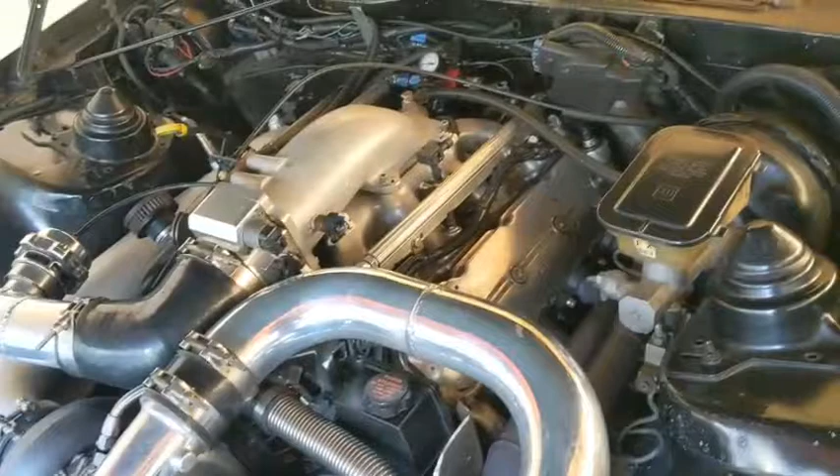I still haven't done the intake manifold. I do a lot of stuff here, but bigger stuff I like to do at my brother's house, just because this is just a little carport tent. He's got a garage and tools, and it's just easier to work on.

Where I'm at now, I started tuning, laying into the throttle a little bit, and it's been a disaster, to be honest with you. I'll show you guys on the data log quick. Okay, here's the data log, and forgive me, I'm still learning how to use this, but I got a slight handle on it, I think.

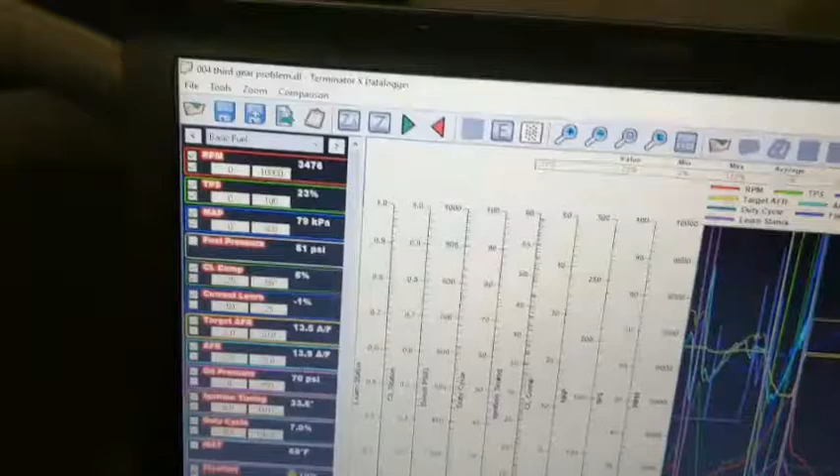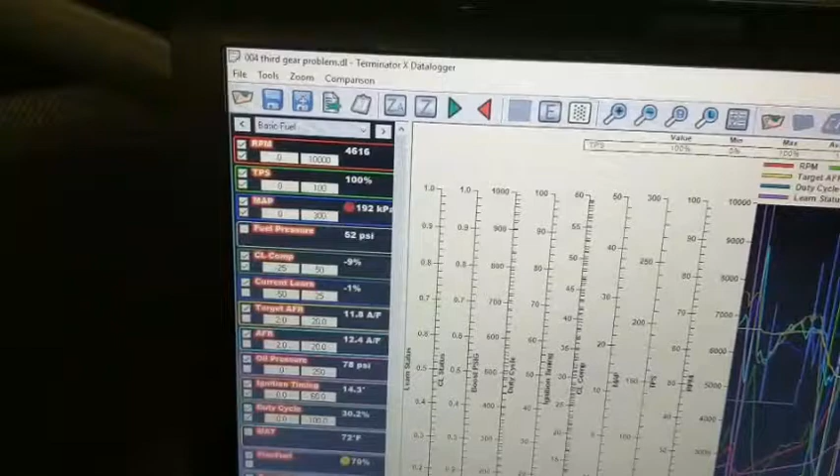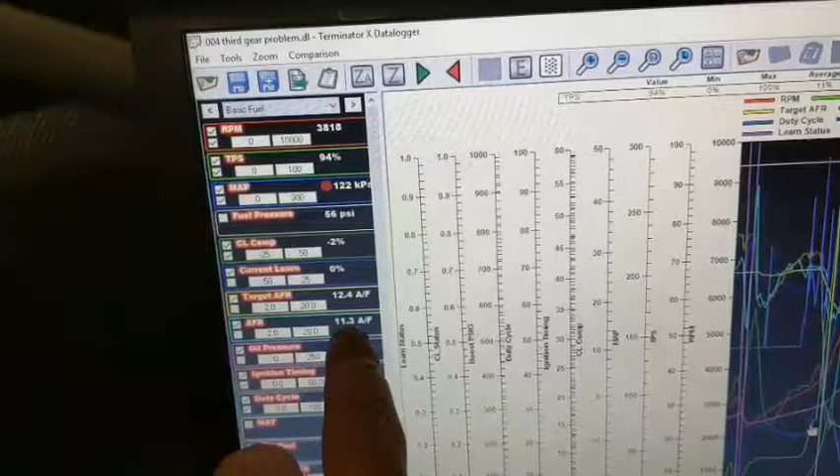Duty cycle on the injectors. Ignition timing. Oil pressure. Here's your actual air-fuel ratio, and here's the target air-fuel ratio. So as you can see, this is the closed loop compensation. So that's what it's doing to try to achieve the target. It's doing work, it's pulling fuel. It was too rich. So as we scroll along here, you'll see.

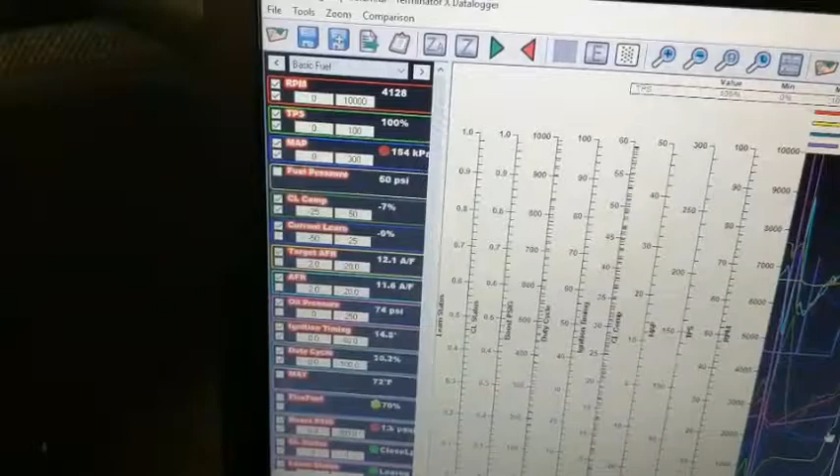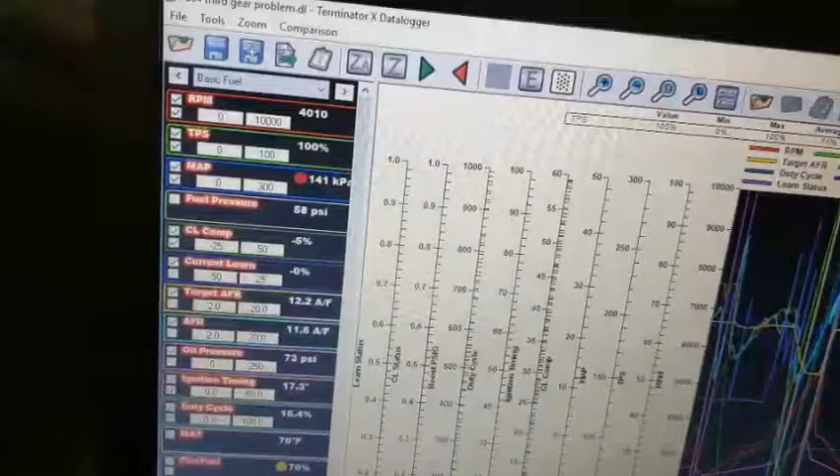Look at fuel pressure. That's one thing that was a red flag right away. Fuel pressure should not be dropping like that. I have a 1-to-1 boost reference, so as boost increases, so does the fuel pressure on a 1-to-1 ratio. So let's say my base is supposed to be 43, but with the vacuum line hooked up, it's like 48. So 48 pounds of fuel pressure plus 1 pound of boost, it should go up.

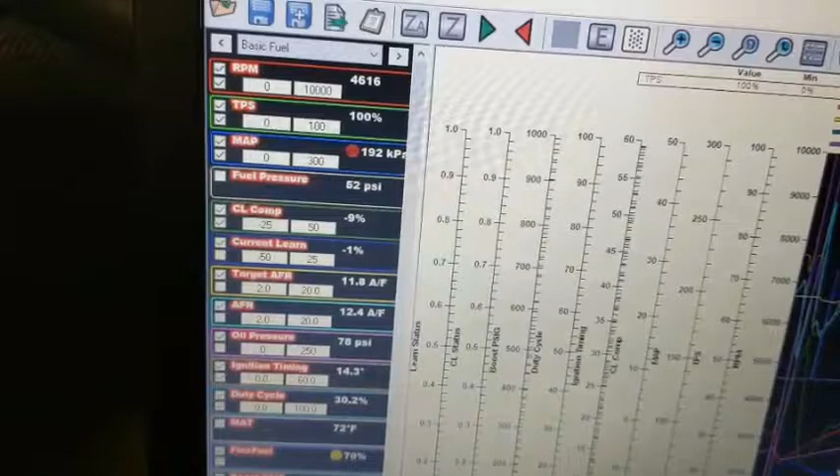So it does start to go up, and we're at almost 6 pounds of boost and 52 pounds of fuel pressure, but then look at it, it just starts dropping like a rock. 44, 43, 41. So fuel pressure's going down. Huge red flag right there. And what that was is, I'll show you guys, hold on.

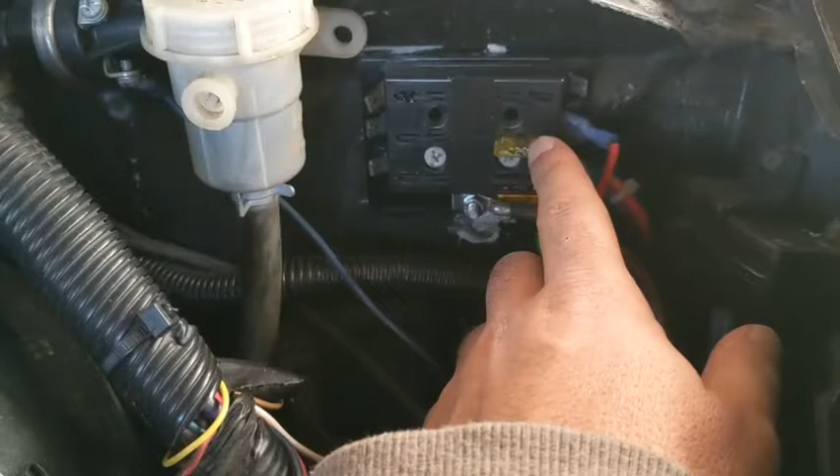What that was, for some reason, and this type of stuff happens, these are my two fuel pumps. The 20 amp is the single fuel pump that Holley runs, so I run on a regular fuel pump. I have 3 fuel pumps in this car. It's a 255, and that's what you use for cruising around. And then when you get into boost, secondary fuel pumps kick on with this Hobbs switch here.

It's adjustable. I have it on 2 pounds of boost, so 2 pounds of boost is supposed to kick on these secondary pumps. This is a 40 amp fuse right here, because each pump is like 15 amps, so to be safe I put a 40 amp fuse in there. For some reason, there was a 20 amp fuse in here, and it popped, and my secondary fuel pumps didn't kick on. So that's what happened, and it could have been disastrous. I'll show you guys what I mean.

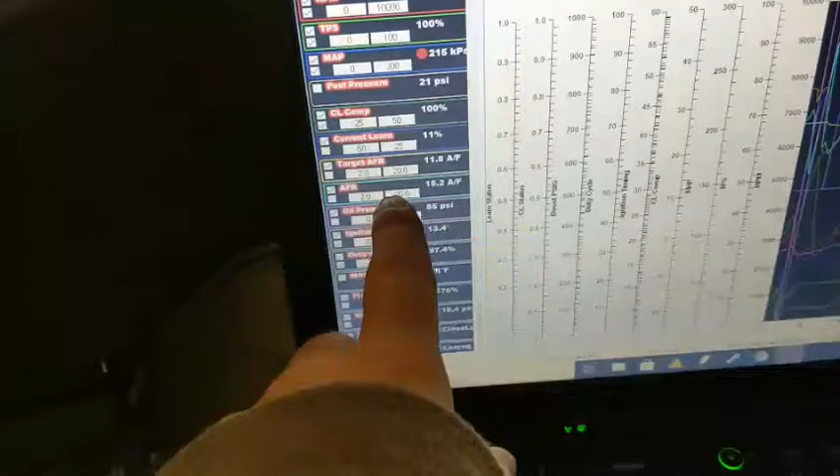Basically, we're at 21 pounds of fuel pressure and 16 pounds of boost. And look at the closed loop compensation. It's throwing everything it's got at it. 91%. You keep scrolling, 100% closed loop compensation. It's throwing everything it can to try and keep the AFR target 11.8. Look at what it hit, 15.2. That's insane.

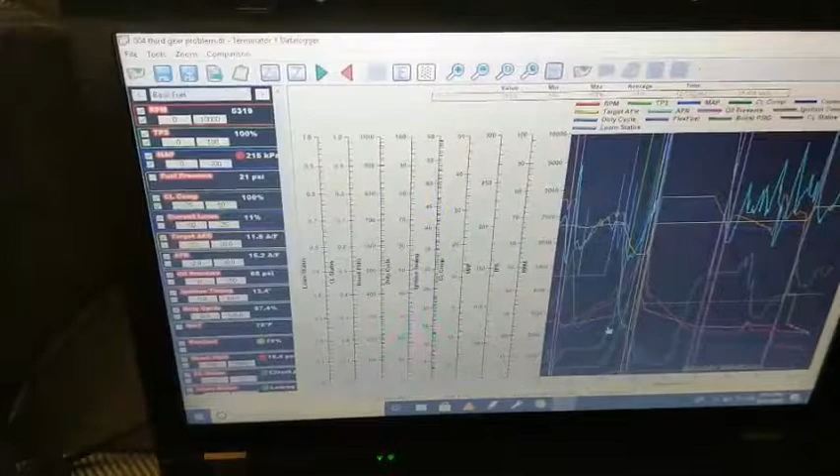If this motor was stock bottom end, stock pistons, they'd be at the bottom of the pan right now. A lot of guys do a lot of things with the stock bottom end, but stupid stuff like this, something will happen, and you got pistons at the bottom of the pan, or at the very least a broken ringland, melted piston, what have you.

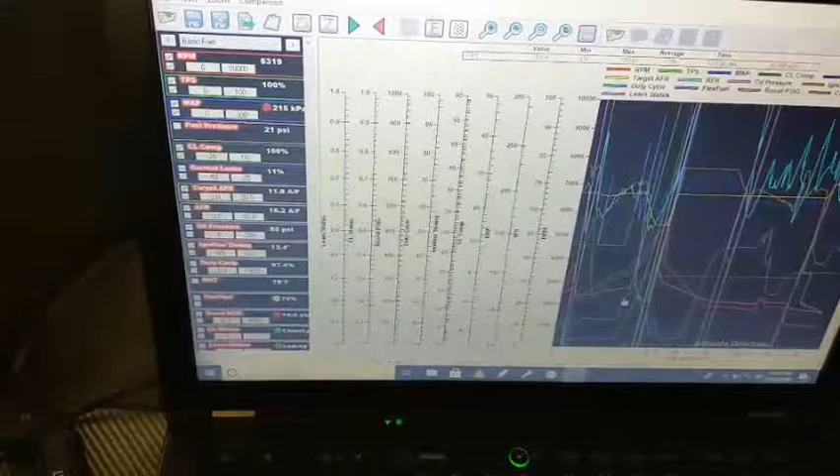So I was really lucky with that. I don't think the motor's hurt at all. Seems fine. Some would say, oh, you should do a compression test, yada yada. But it was only 5,000 RPM. It was like a split second that it hit that high.

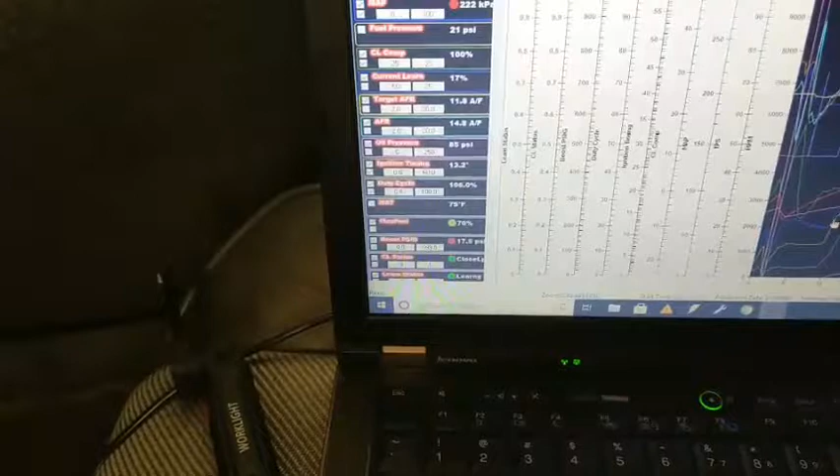And the other thing I'm noticing too is if you look at the boost down here, 16.4 psi. Wait, look, 17, 18. It hit 18, almost 19 pounds of boost with a 15.2 air-fuel ratio.

That's crazy. Again, built motor. That's why it survived. Forged pistons. Yeah, that would have killed any stock motor, I think. So, what happened there? I'll try and show you guys.

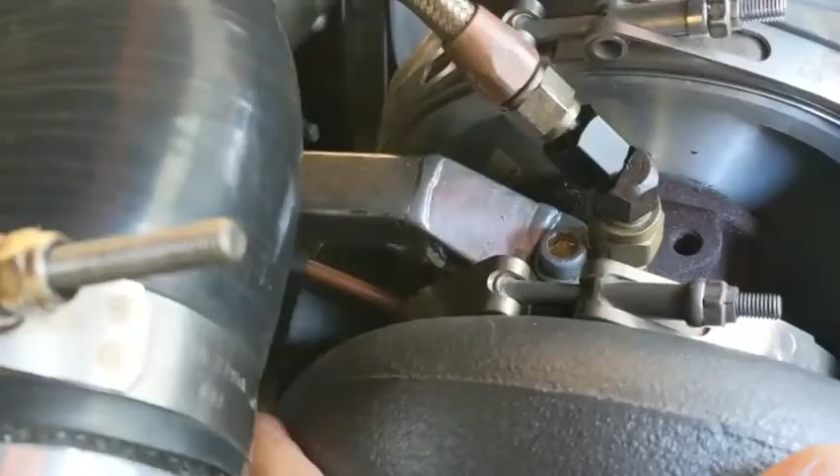Okay, I think what happened there, it's kind of hard to see from this angle, but you see this little copper line right there? That is my wastegate reference. That goes to the bottom of the wastegate down there. You can see the fitting there. But what I think happened, and I noticed it was slightly kinked.

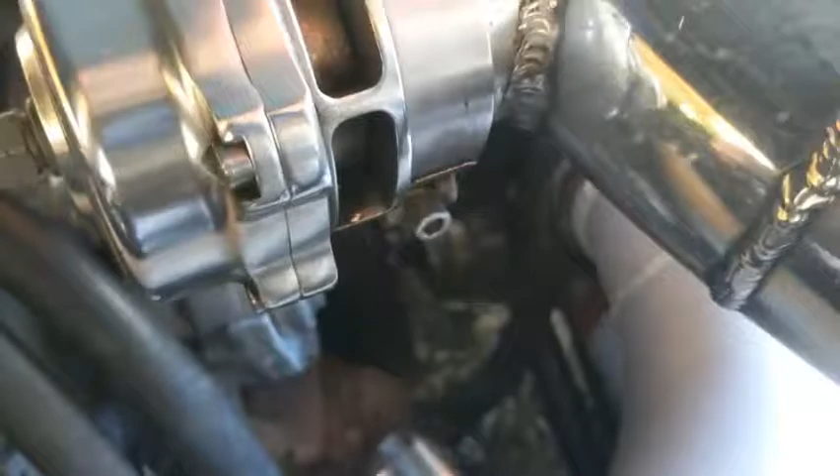So I bought some goodies. Basically this is just an oil feed line. The reason why I run copper over there is because it's extremely high temperatures. You can't even see it down on this side. It's a pain. But yeah, so I run a piece of copper on there, but my fear is that it's kinked. I'm going to take it off and look, and I'm going to replace it with this bad guy.

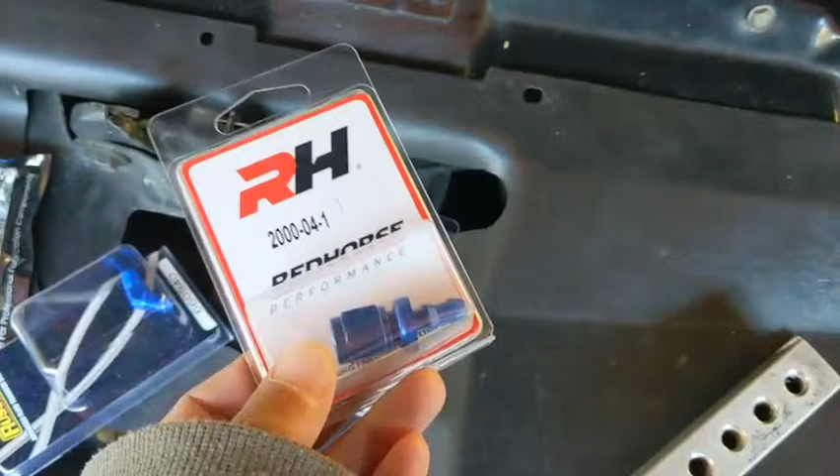And I got some fittings to do that. I can put a 45 on it, possibly, on the wastegate, and then I'm going to screw this guy on, and then it'll go to hose, and then go to that plastic line. I ordered one of those push lock fittings so I can screw right on the end of this one. So yeah, I won't have a piece of hose being janky with clamps on it or whatever. Those push lock fittings work pretty good.

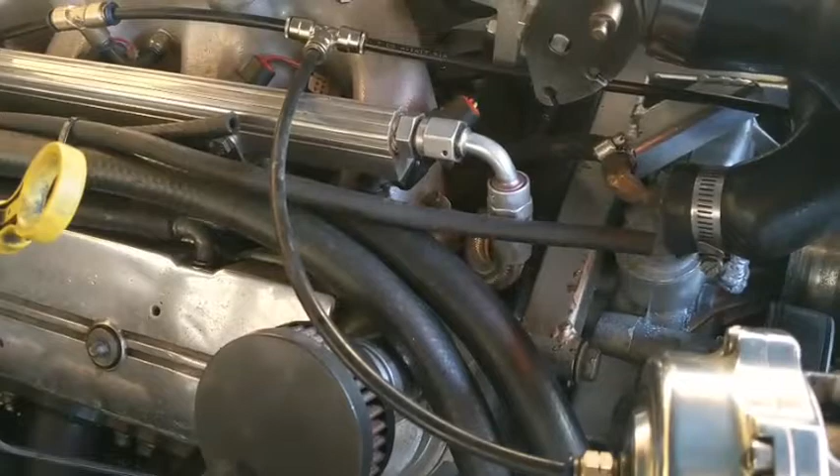You got to be careful. You got to get the good brand stuff. They sell cheap stuff that melts. This is official, high temp, high pressure. They use it on air brake lines for trucks and stuff, so it's got to be reliable. It's got to be good to stop a big tractor trailer. So that's my plan for today. I'm gonna swap that line, take it for a ride, and keep an eye on the boost.

I did do another pull after I changed the fuse, and fuel pumps were kicking on. Air fuel ratio was better. I'll show you guys that data log quick. Okay, here's the second data log. I did just a quick second gear pull just to see what was going on here, and let's scroll and see what happened. Fuel pressure is 52, 2,000 RPM, 3,000 RPM, 60 psi. It's going up, stayed up. 64, 65, 68. So yeah, wow, I hit almost 6,900 RPM.

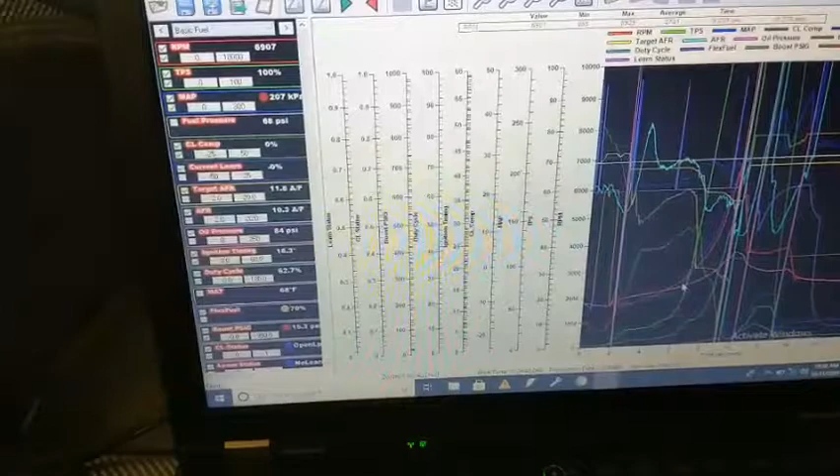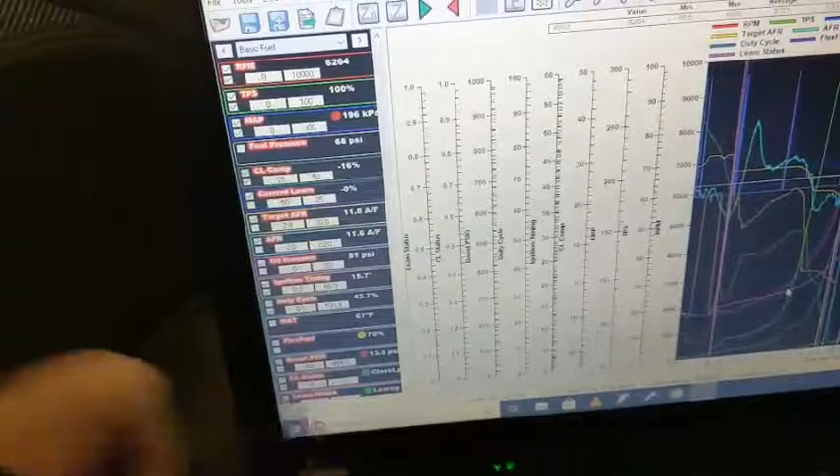So yeah, this time it did a lot better. The fuel pressure didn't drop. Look at the closed loop pulling 16%. There's way too much fuel in there. I sent my file to Matt, and he threw some more fuel at it just to be safe. I was a little concerned, on one of the small pulls I did, the air fuel ratio target was 11.8 or something, and I was seeing 12. So he just splashed a little more fuel at it.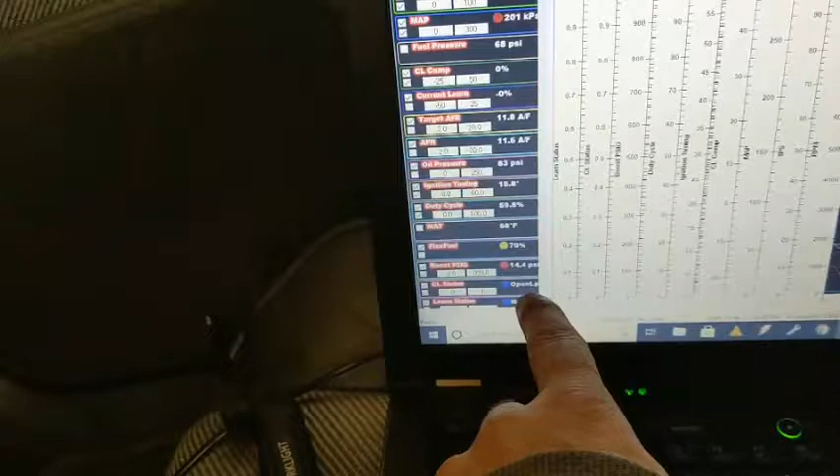But it looks like the closed loop's doing its thing. It's pulling fuel to try and achieve this target AFR. 13.5 pounds of boost. I did see a little creep on this one as well. Second gear, it spun. See, why did it go in an open loop there? That's weird. See how it says open loop? Why the hell is it going in an open loop? That's strange to me.

But yeah, it hit 16 pounds, which it shouldn't be. I have a 14-pound spring in there, and I guess it could creep a little bit. But yeah, that's weird why it went into open loop there. Why did it go to open loop? That's interesting. I'll have to talk to Matt about that.

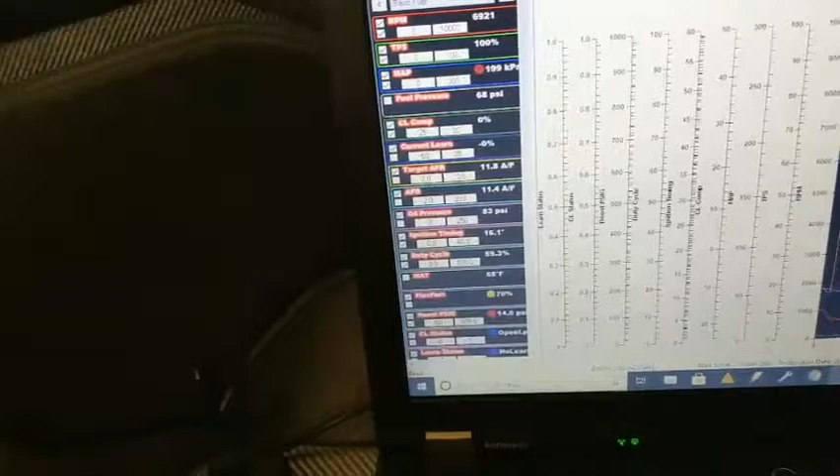Alright, and I wanted to show you guys one more thing. Let me find it. Okay, this is the fuel pressure safety. There's fuel pressure safety. What's this one? Oil pressure safety. Flex percentage. That was me trying to get the, that's nothing.

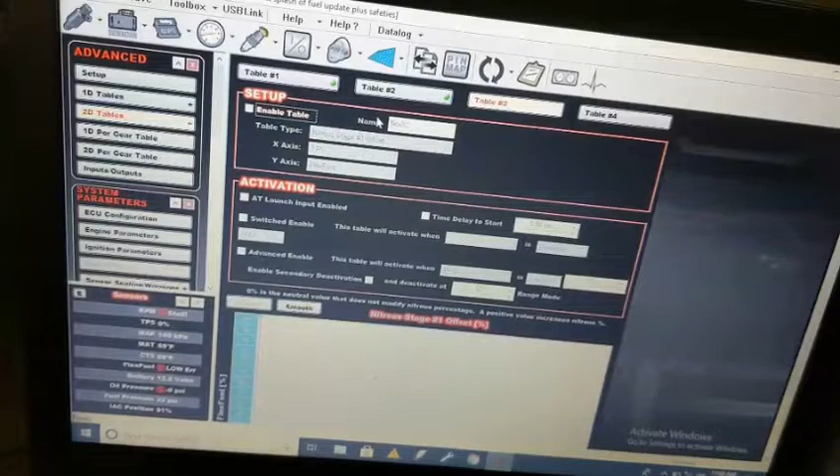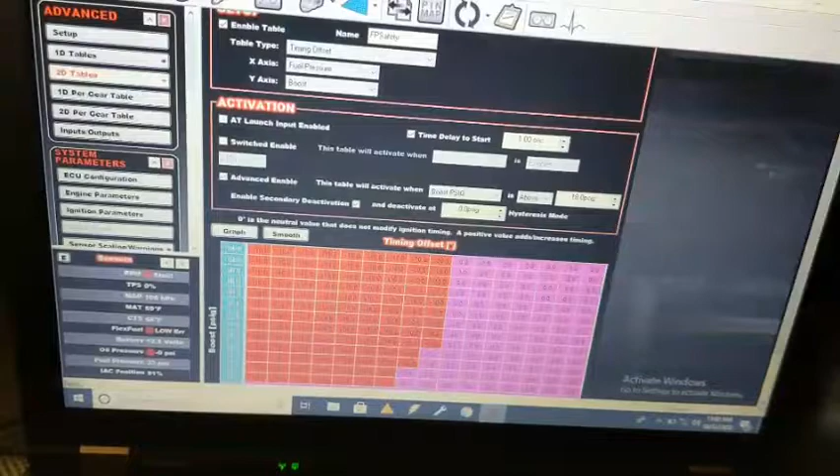Yeah, I don't know what these are. But so, fuel pressure safety and oil pressure safety. So it's a timing offset, which I set that up. So basically it's going to pull timing. Before it was a dwell offset. Like you can click this and change what you want it to do. And I think before it was a dwell time offset, which I'm guessing that's a spark cut. I have to research it.

I'm new at this. Bear with me. I know some of you guys are probably screaming at your screen. But so for now I did a timing offset.

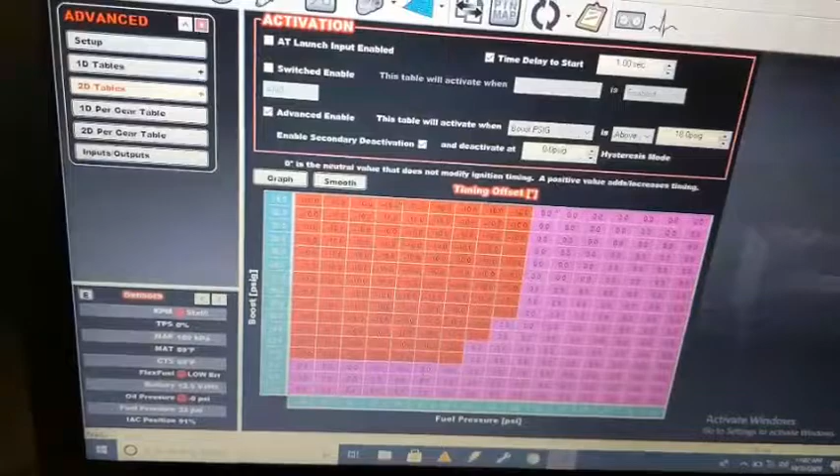Oh no, what'd you do? Go back. Shoot. How do I undo? Hold on. Let me see here. Okay. Again, I'm new at this. I just closed the tune and opened it back up, and it's still there. So I did save it. I try to make a copy of every tune I do.

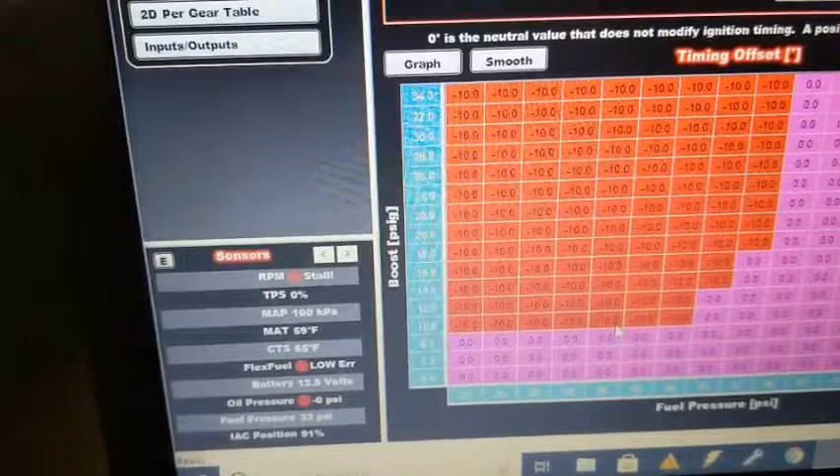But anyway, what I was saying was this is a timing offset based off of fuel pressure and boost. So if you look on this right corner over here, let's say we hit 20 pounds of boost and 57 pounds of fuel pressure. So if that ever happens, it's going to pull 10 degrees and basically try to save it.

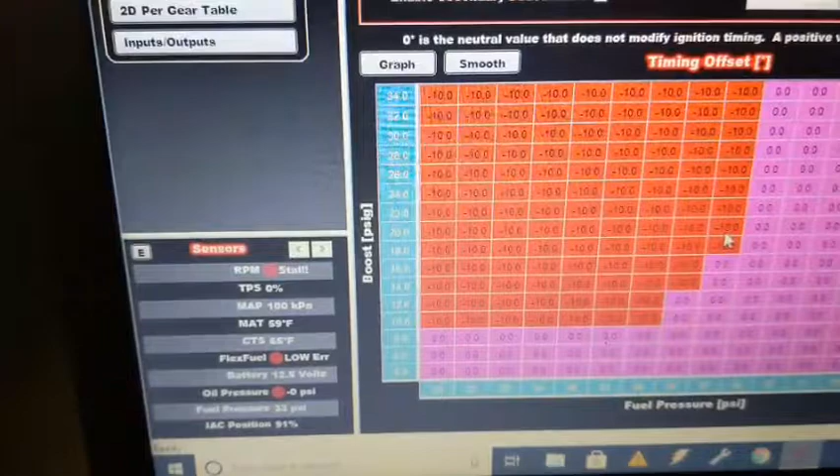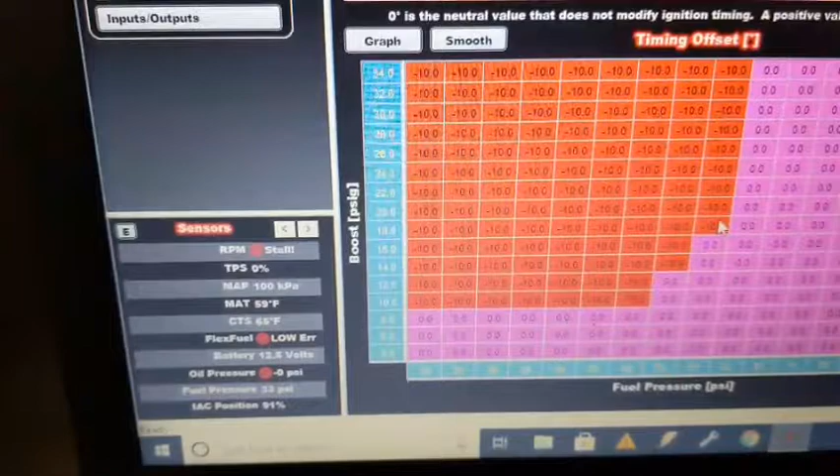I mean, I could probably adjust these and move it closer, but even at that point, 57 fuel pressure would be dropping, because you figure I'm at 43 base pressure plus 20 pounds of boost, should be at 60-some pounds of fuel pressure. So this might be a little oversensitive, I guess, but again, I don't know.

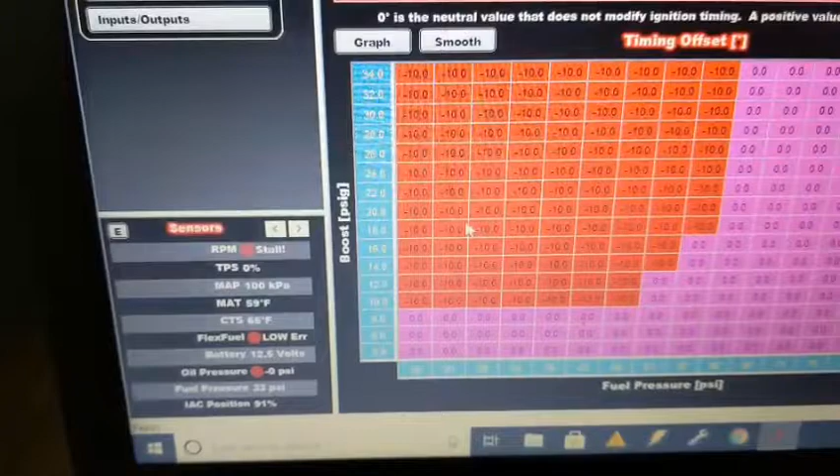I have to do my research, but at this point it looks to me like if you're at 18 pounds of boost and 57 pounds of fuel pressure, see, that might be too much already. What's 18 plus 43? Yeah, so I might have to tweak this a little bit, but yeah, if fuel pressure gets out of whack, it's going to start pulling timing 10 degrees.

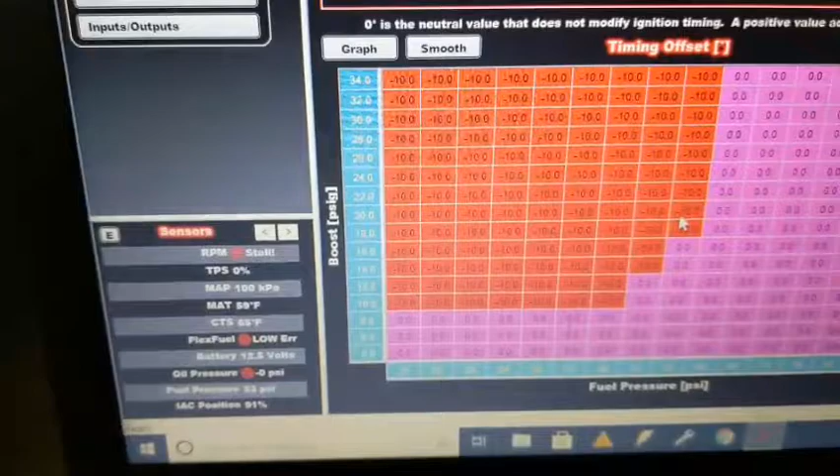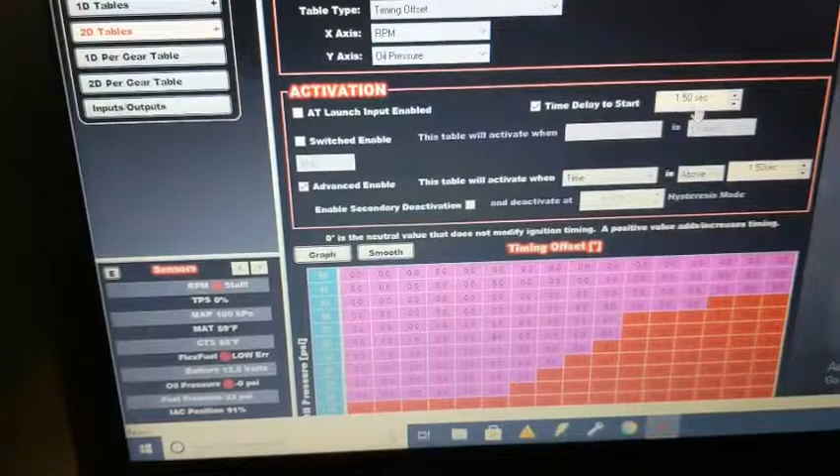And same thing for the oil pressure. I didn't have this set up before, and now I'm going to do some research and try and get it set up right. I mean, I have this stuff in here built in, so you might as well use it. Same thing, timing offset, RPM, and oil pressure. So again, I have it set up to pull timing basically. So this thing has crazy oil pressure with this oil pump in it.

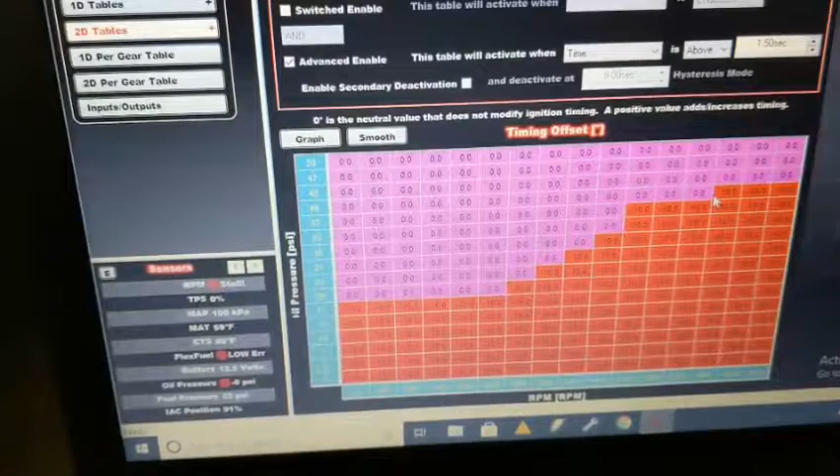But if it ever goes down to, let's say, 40 pounds of oil pressure at, what do we got here, 6,900 RPM, it's going to pull 10 degrees. It'll never go that low. I think it hit like 80 on the data log. But if it does go that low, then you clearly have a problem, and this will shut the engine down, or at least pull power, and you'll feel it and let off like, whoa, what the hell was that?

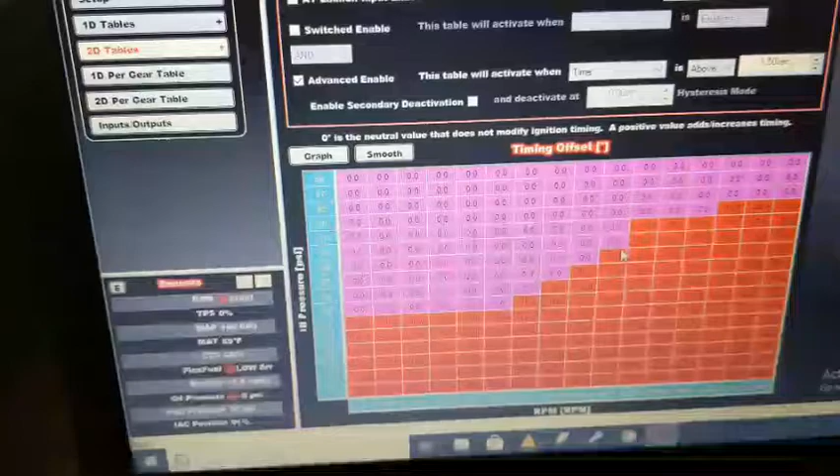But yeah, I want to do my research on this and get these tables set up better. Maybe it's better to do the dwell offset. Yeah, I want to do some research and set these up right. But for now, it's going to pull 10 degrees of timing if any of these get out of whack. So yeah, that's what I'm going to do there.

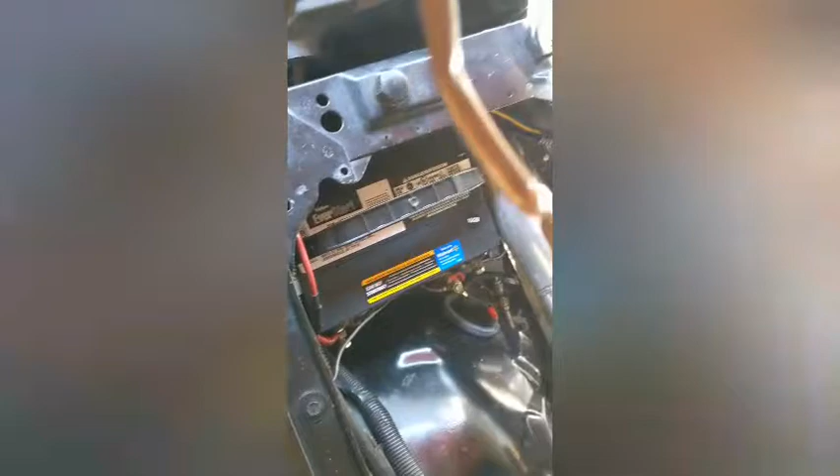All right, now let me get over and I'm going to change that wastegate line and take it for a ride. Okay, so here's the wastegate line, and it's all mangled up, but admittedly I don't think it was that bad initially. Like when I went to loosen this fitting, the fitting that it attached to was NPT, and that started turning, so the whole thing was turning and I didn't notice, so I kind of fucked it up removing it. But yeah, I'm gonna put this bad boy on here and route it so it's not rubbing anything.

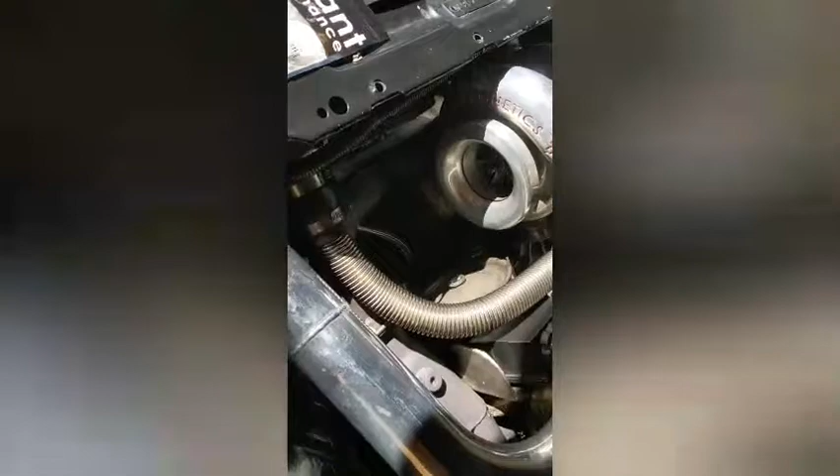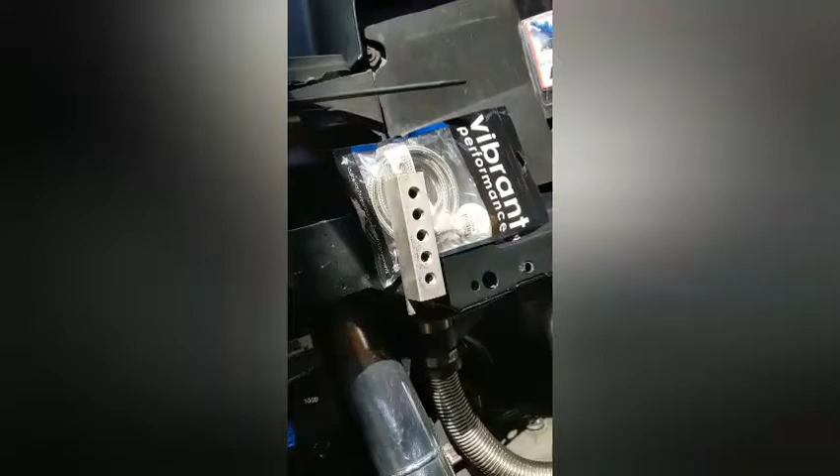It's tight down there. The other thing I want to do is, this is my fuse block. I mean, not fuse block, vacuum block. And I used to have that underneath the throttle body, like down in here. But now that we're running the turbo brace, it kind of doesn't fit there anymore. So I'm thinking maybe I'll mount it on the firewall or something.

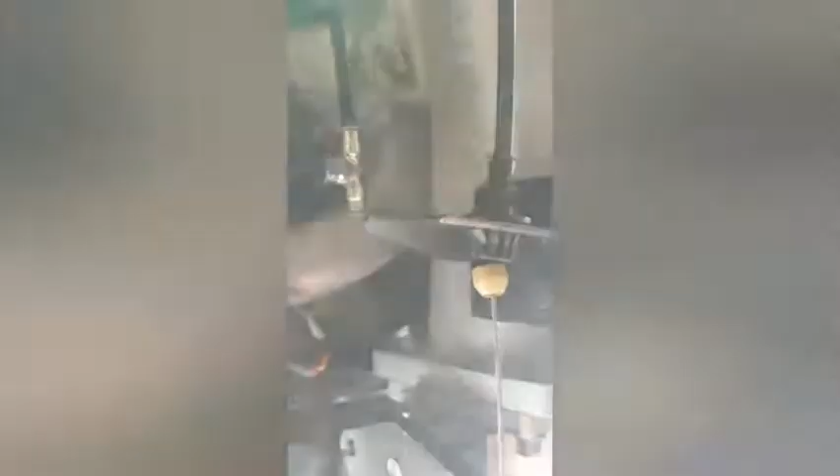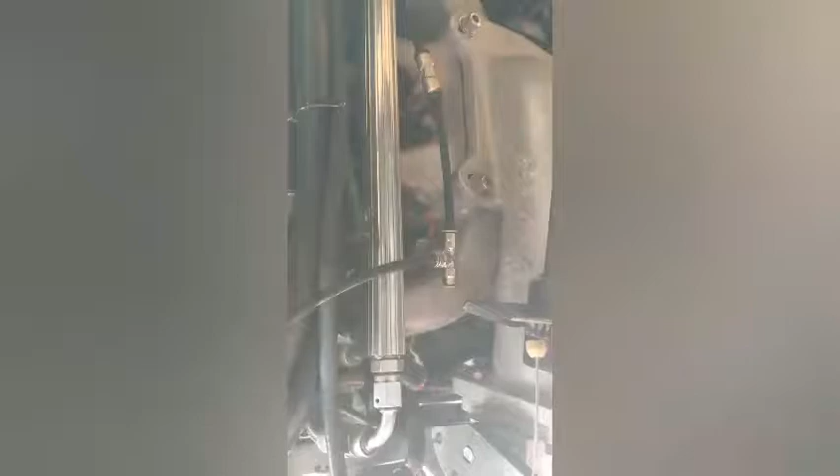The reason being is you got so many vacuum lines. I got everything teed off right now. You got a T there, and it goes to a vacuum source on the intake, I think on the back here. But these are the boost controller lines here. Once I hook them up, you need more T's, and it's just not the best way to do things.

So I'll probably incorporate the vacuum block again, maybe mount it on the firewall, because I plan on getting a MAC valve for electronic boost control, and I'll probably mount that here, and I'll have the vacuum block there, run the lines too, because you'll have 3 lines there and a vent. So yeah, it gets busy real quick with the vacuum stuff.

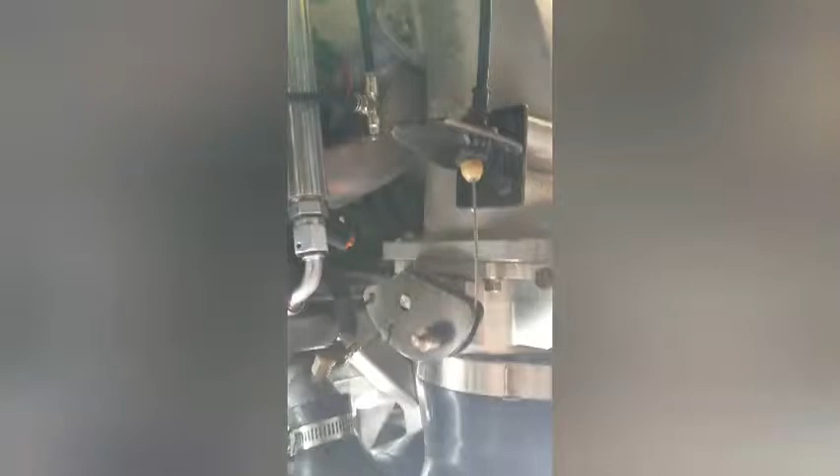So, but for now, I just want to hook it up on wastegate and then see if the boost creep problem went away. So yeah, I'm gonna put that on. Okay, so I got the wastegate line hooked up. It ended up being too long. I had to snake it around there, and then yeah, I have to have a dumb hose nipple to that.

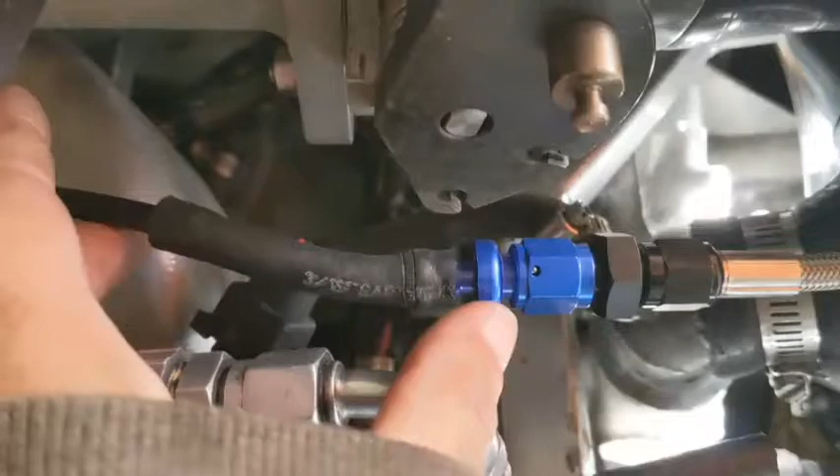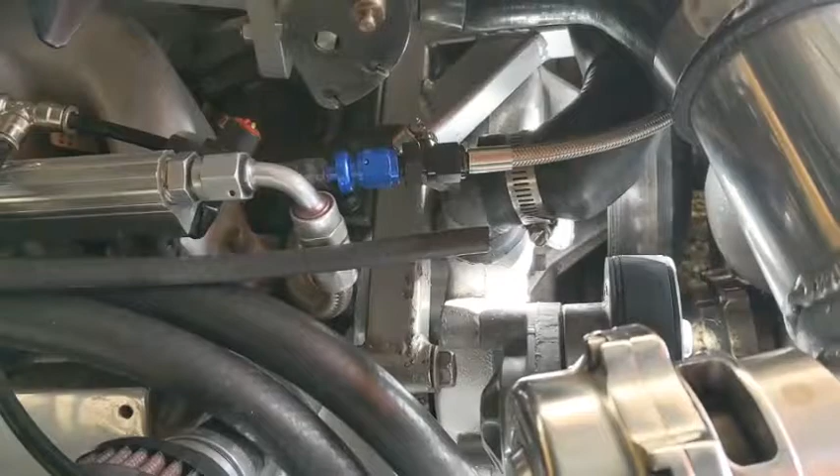Like I said, I have a fitting coming that will, one of these push locks will screw right in here, and then I'm thinking about doing the vacuum block, and so I'll probably reroute this line, like maybe on this side back there, and give it its own line. I don't like teeing everything off like that. It just diminishes the vacuum signal, the more T's you have on it. So yeah, I think that's it. I'm gonna take it for a ride, see what happens.

Alright, we are cruising. Got the data log set up, and we'll see how she does. Try and keep an eye on the boost. I do have the fuel pressure safety set up. That seemed okay too. I messed with the boost pressure safety. I think that's set up as well. I think I have it set at like 18 pounds. If it goes there, it's gonna pull timing, cut spark. I think I have it set to cut spark. So let's see how it does.

Data log and see what happened. Yeah, something happened. It might have cut spark, or because I didn't let off. It felt great. It felt really strong, actually. 14 pounds. But I was glancing at my boost gauge, and I thought I saw it hit like 12, 13.

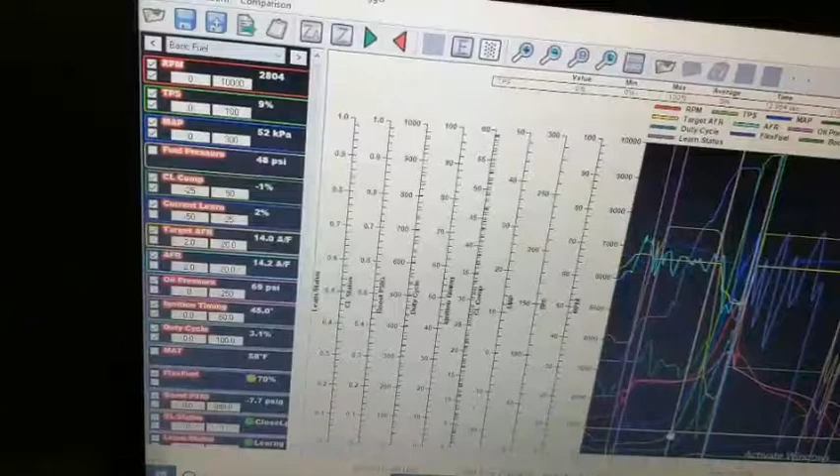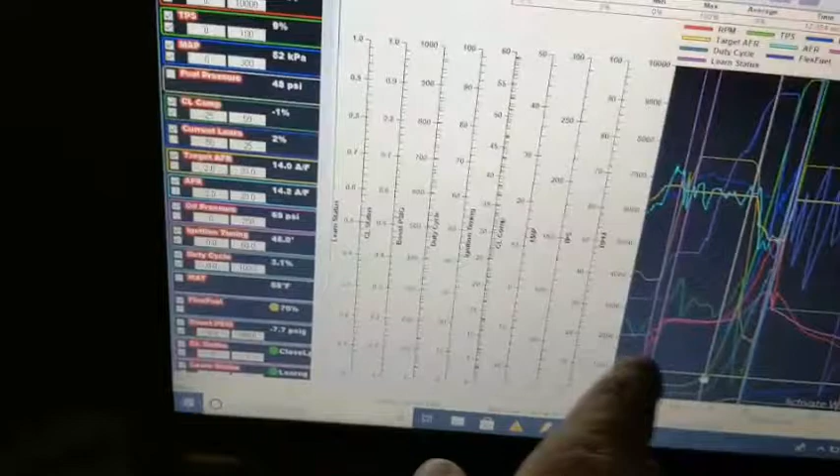Okay, so here we are, and as I suspected, the boost went up and it cut out. That's good. That's what it's supposed to do. I'm happy about that. But again, here we are. I usually go by the throttle position. It's the green one, and you can see it start ramping up. So I'll start there, and then start scrolling over.

And what do we got here? 25% throttle, 93% throttle, 100% throttle, 99. It's kind of bouncing off 99. 100% throttle. Okay, we got 71 pounds of fuel pressure. That's good. Closed loop compensation is pulling 17% of fuel. Target AFR is 11.8. Actual was 11.9.

Crazy oil pressure. This is a high volume, high pressure pump. It's pretty normal when you're idling, but when you get on it, the oil pressure really goes up. I do have the oil restrictor on there. That's probably why it was blowing oil past my turbo. But ignition timing 13.6 degrees. Yada yada. Duty cycle is only 38%. Yeah, these injectors are monsters. The 210s, even on 1,000 horsepower, it was like 60% duty cycle.

All right, intake temp was 63, flex fuel 70%, and here's the boost, 15. Again, I have a 14-pound spring in here. See, it kind of jumps up. 14, 15, 17. That's not good. It shouldn't be going that high. 16, 17, hit 18. Ignition timing 13 degrees. 14.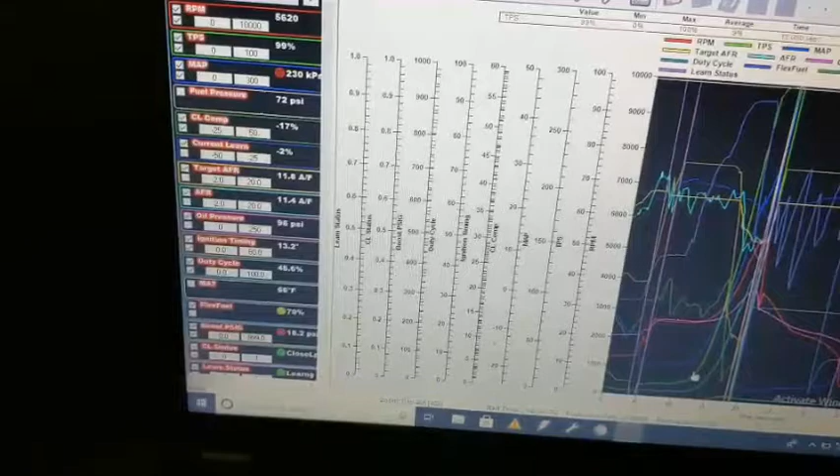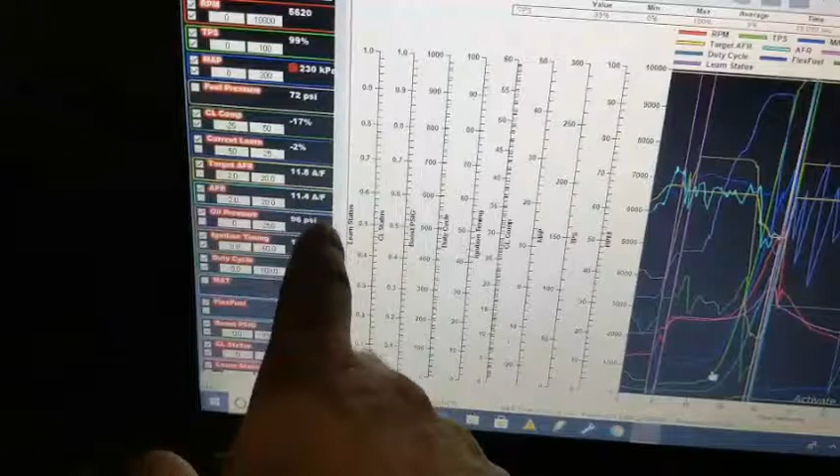My next step is I'm going to take that gate off, make sure it's working right. Sometimes it gets stuck. The car did sit for months. So maybe the gate is stuck. But yeah, that's not good. It shouldn't be hitting that high a boost. It's only a 14-pound spring in there. I mean, this time it was safe, 5,600 RPM. 11.8 AFR, 11.4, so it was safe. The Holley's doing its thing and closed looping.

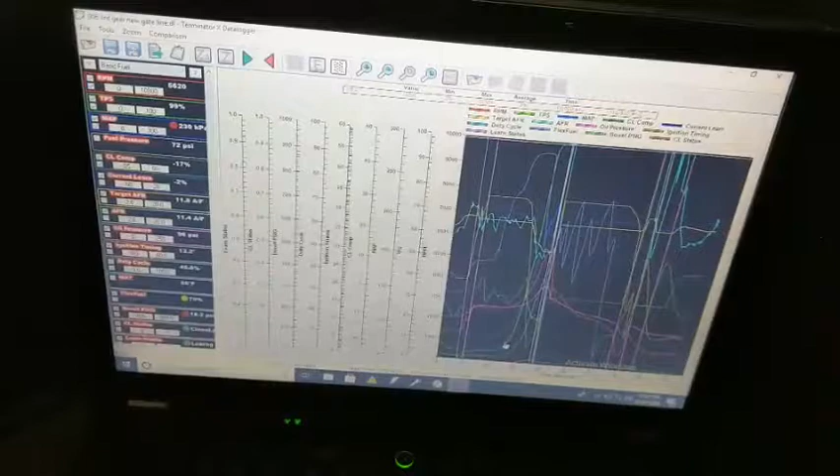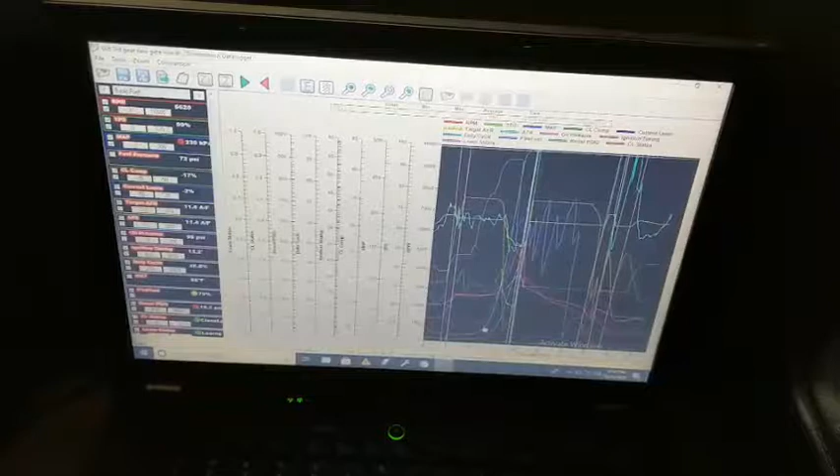But yeah, the other thing I could do too is just turn off the safety and let it run away. But I gotta pull that gate and make sure it's not stuck or something. Sometimes if the car sat for a while and if you had any kind of moisture in there, it's stainless steel, but who knows? Maybe the gate's stuck. But yeah, the other thing I want to check is make sure the wastegate line didn't actually fall off.

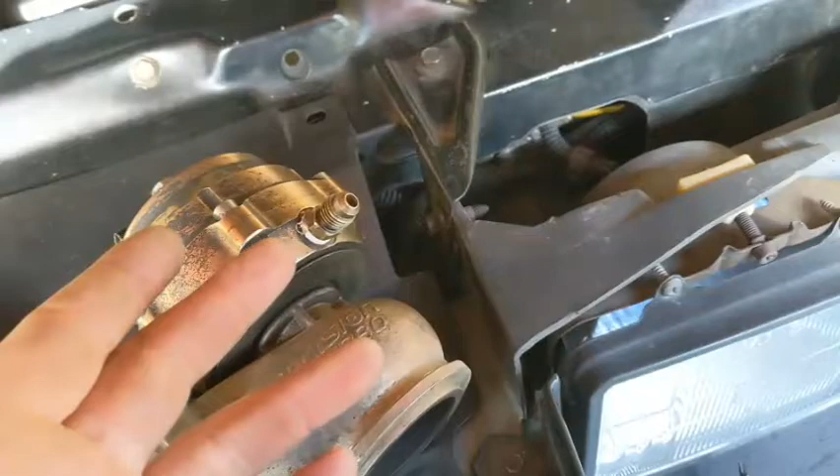Okay, got the wastegate off. And how you test this is pretty simple. This is the reference line. So what you do is you just put air pressure in here and see if the valve opens. Best way to do it is set up a regulator so you're regulating the air pressure going in here, and I have a 14-pound spring in here, so it should start opening at around 14 pounds. And if it doesn't, then maybe we need to unstick it. Maybe it's stuck.

And so yeah, I'm gonna go over to my brother's house and rig this up so we can test it. The other thing I might do while I'm there is change the spring in here and go with like a 5-pound spring. Because what I want to do, if it's possible, if it's not a creep issue, is set up the electronic boost controller, get a 4-port Mac valve, and then in theory I should be able to have everywhere from the wastegate spring, which if I put a 5-pound spring in there, everywhere from 5 pounds,

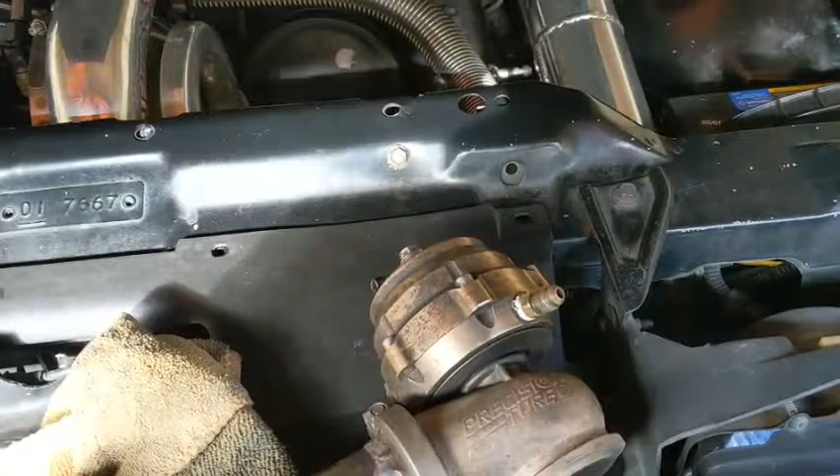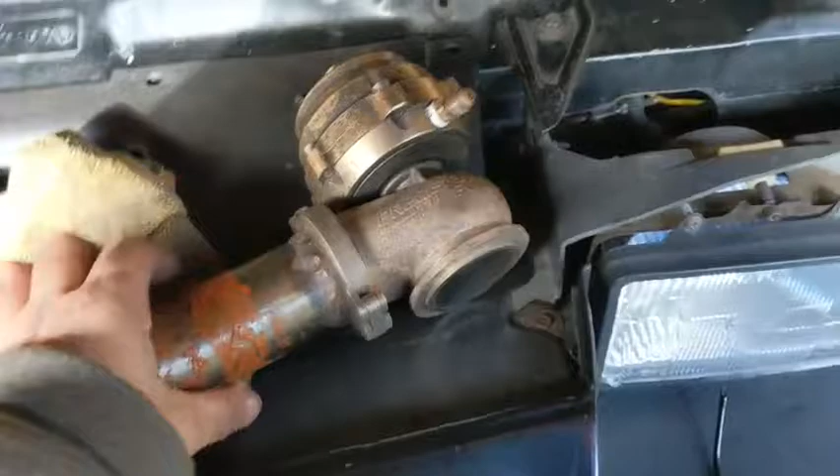and then manipulate it as high as 20 or 30. And then the plan is to incorporate the boost control strategy with mile per hour or boost by gear, so it gives you a certain amount of boost depending on how fast you're going. Basically, because in this car, first, second, and third is just useless at full boost. So you could do first gear 5 pounds, second gear 10 pounds, third gear 15, fourth gear full boost, stuff like that to help get some traction. So yeah, that's my plan. I'm gonna go test this thing out, and I'll get back with you.

Okay, I got the wastegate back on. I took it over to my brother's house. We tested it. It was opening at like 17, 18 pounds. I really don't have an answer why it's that high. I checked the springs. I had the yellow spring and the green spring, and according to the instructions on the Precision wastegate box, I still have the box and all the springs it came with, it's supposed to be around 17 pounds, but it's opening at like 17 pounds, so that makes sense. Yeah, I could have sworn I had a 14-pound spring in there. I didn't think I had it that high.

So I swapped the spring, put a 6-pound spring in there, and yeah, I'm gonna take it for a ride now. I got it all hooked up. I got the line hooked up. Yeah, you want this almost by itself. Like, teeing off all this other crap is really not ideal. Like I said, every vacuum source you tee off of, it diminishes the signal. So maybe that's why it was going that high. I don't know. Anyway, I got a 6-pound spring in there, and let's take it for a ride and see what kind of boost it gives now.

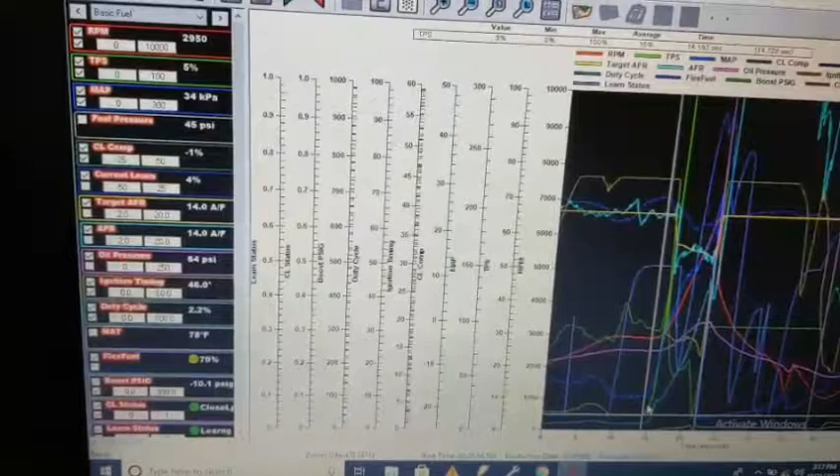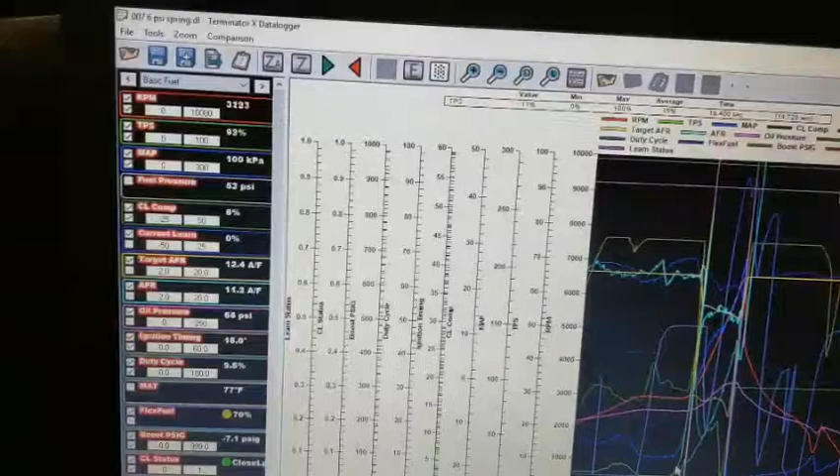Okay, so we definitely have a creep issue. Let's scroll through here. Started getting into it. 100% throttle. There's the boost, 0.2, 4, 3 pounds, 5 pounds, 6 pounds at 4,000 RPM. And it should level off there, but as you'll see, 7, 8, 9. It really starts running away. High RPMs. 10, 14, 15, 16. Yeah, hit 16 pounds of boost with a 6-pound spring in there.

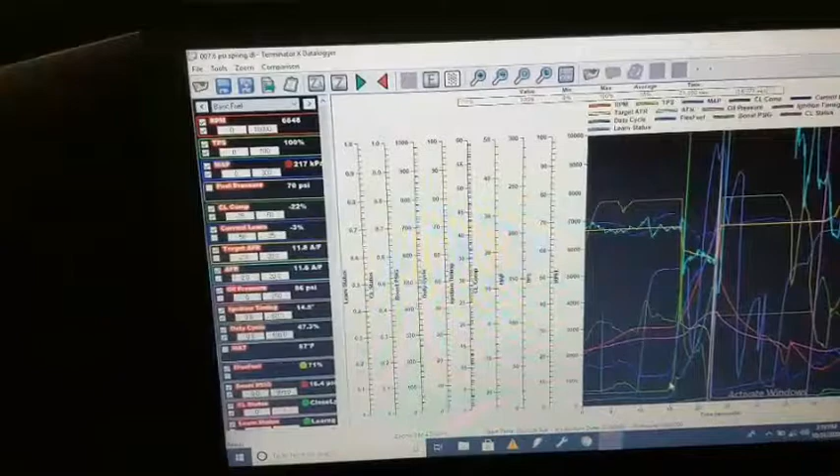Man, that sucks. Boost control might be impossible. There's a couple things I can try, I think. I could put the wastegate on its own source, separate from everything else, see if that helps. The other thing I could maybe do is, I have the wastegate recirculating back into the downpipe. So if I take that off, it might help. Just have it dump into the atmosphere instead of recirculating back into the downpipe. This motor is higher compression, so maybe that's what's causing it. A bigger gate would definitely help. A bigger turbine would probably help, I think.

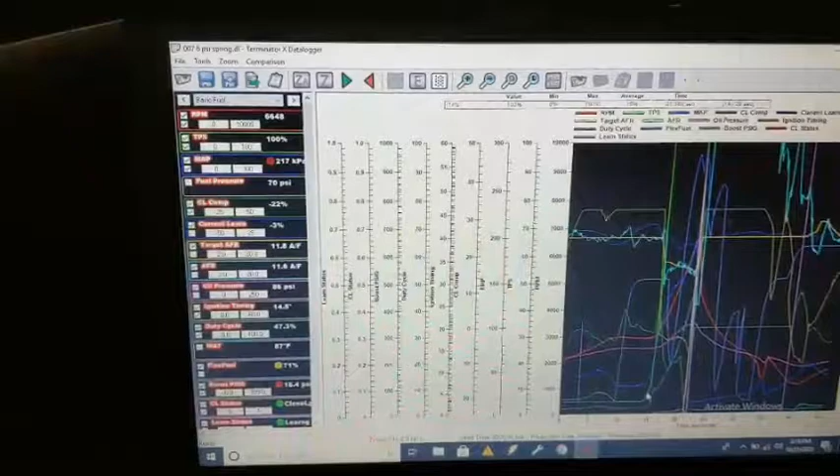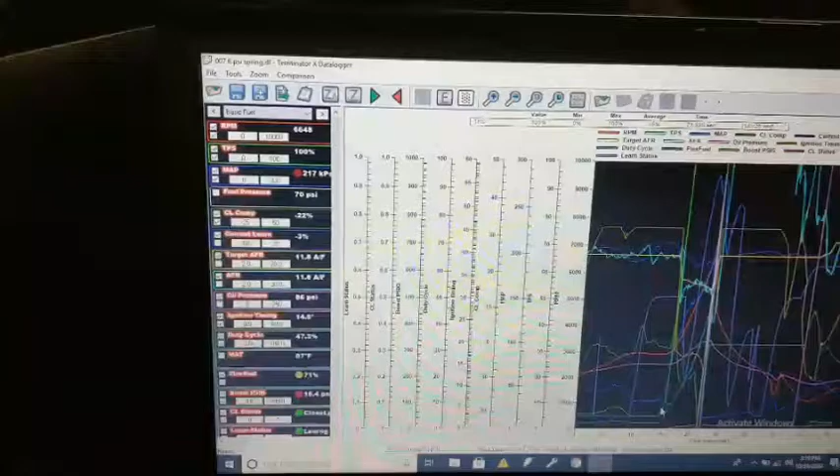Yeah, I don't know. It kind of sucks. I mean, as long as it's safe, it's one thing, I guess. But this is just third gear. I don't know what it's going to do in fourth gear. If you got enough fuel and everything and it doesn't peak out at a crazy boost number, you can just throw fuel at it and let it creep. But yeah, this kind of sucks, man. I don't know. Let me think this over. I'm gonna pop the hood, check everything out, make sure everything's all right. But yeah, man, fucking 16 pounds of boost, 6,600 RPM, with a 6-pound spring in there.

Closed loop is pulling a bunch of fuel. Fuel pressure's high, 70 psi. Crazy oil pressure, 86. I saw some oil under there on the turbo, so maybe that restrictor has fixed that problem. I'll have to look under again and see if the oil's there. If the oil's still there, then I gotta get an even smaller restrictor. I think this one is 75 thousandths or something. But yeah, let me pop the hood and look everything over.

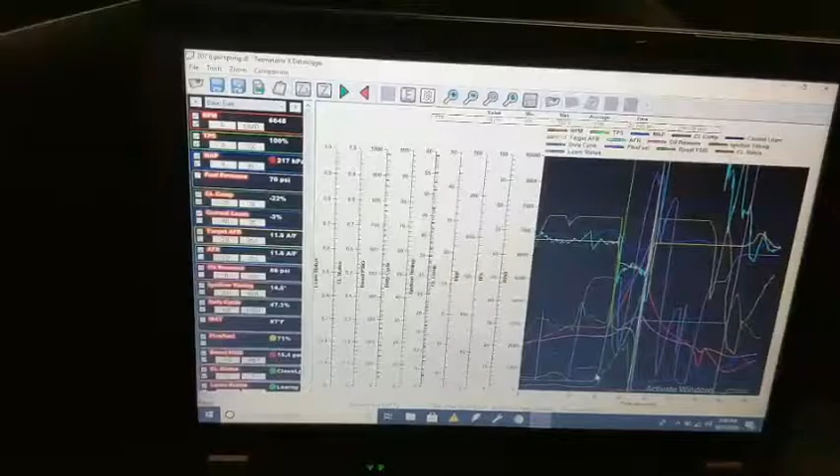Alright, so I looked over the engine bay. Everything looks alright. Nothing leaking. Yeah, I feel a little defeated. Kind of sucks, man. I'm gonna try to get the wastegate on its own source. I honestly don't think that's gonna help. Really, the only real solution is a bigger gate or another gate, two gates. Really wasn't a problem with my other motor, I think mainly because it was lower compression, less exhaust volume. Or maybe I'm wrong and it is just because it needs its own source.

We'll see. If you take anything from this video, start with the small spring. If you got a new turbo setup, start with the small spring. It's just safer, better, easier.